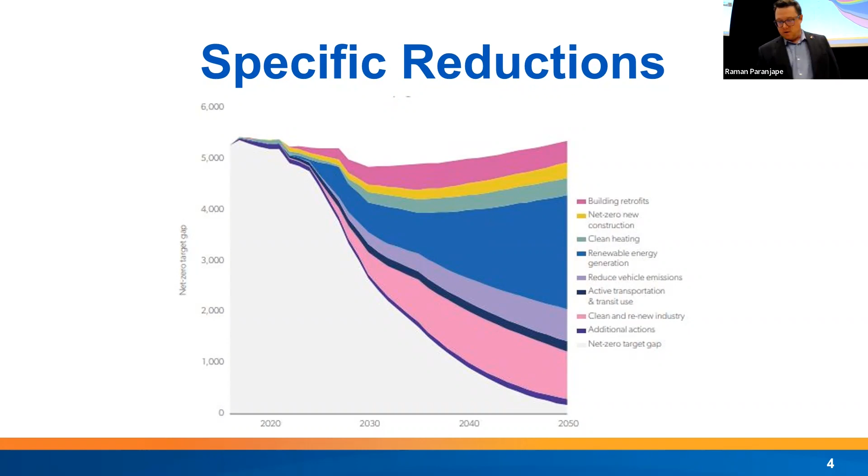How are we going to get there? Seven big moves. This is not some revolutionary theory. Sustainability Solutions Group, our consultant, they've done this for over 60 communities across North America. And this is how they break it down, and this is how they bucket it for every community.

Some of the moves are different depending on the community you are, because we are unique. City of Regina is unique. We are not Vancouver. We're not somewhere in California. It gets cold here. Our electrical grid's different. Our way of living is different, and our perception towards what we want is different. So we really need to work in a different way towards this than every other place as we move forward.

So one of the first ones is retrofitting existing buildings, and this is deep retrofits on a massive scale. There's over, I believe it's 68,000 single family dwellings in the City of Regina, and a vast majority of those were built at least prior to 1980 or maybe a little bit later. As energy codes, as building codes changed, that got better. It's still not the best, but older buildings are horrifically inefficient.

Number one prong of our approach is we need to reduce our energy consumption. So one way of doing that, retrofitting buildings on a massive scale. Switching heating fuel.

You're going to hear Megan talk about natural gas, and I actually get a lot of conversation about this—people ask if you and SaskEnergy must hate each other. I'm like, no, absolutely not. Megan and I connected long ago as this was being produced.

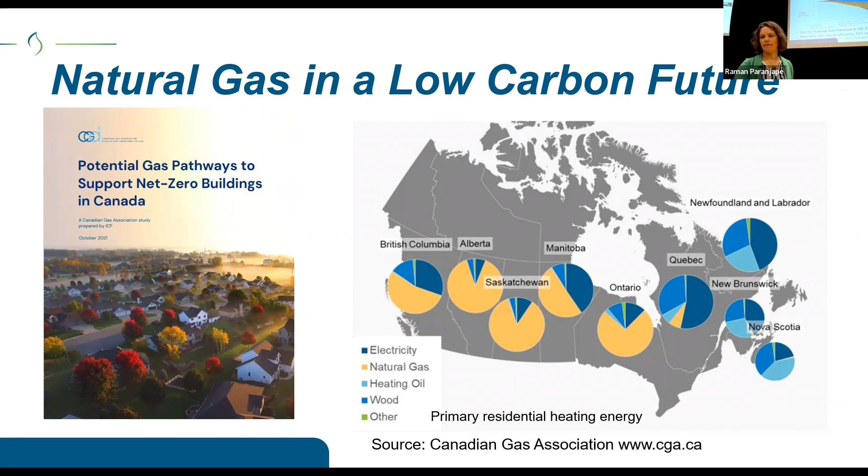And what was found through this is that there are pathways to get down to net zero. That first piece is the most important that needs to be addressed first, and that's energy efficiency. So reducing the gas demand or reducing the energy demand of the buildings is our first step. After that, bringing in low or zero carbon gas supply, and where that's not possible, offsetting that gas with carbon capture, emissions negative emissions technology.

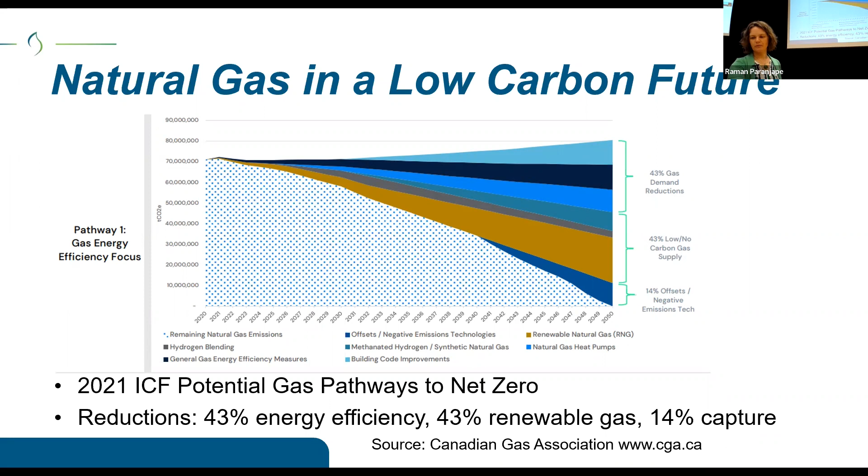So one example of gas in a net zero building is a net zero MURB that is in Saskatoon. It's net zero energy and net zero ready. So it's not fully addressing that emissions piece, but it's a starting point to show there are solutions out there. This building was actually part of a Canadian Home Builders Association challenge, and there was one builder in Saskatchewan chosen, and the goal was affordable, comfortable, net zero ready housing.

This example is currently being occupied partially by low income families, demonstrating the affordability of the solution. And from a technology perspective, there's electric air source heat pumps, both for water heating and space heating, as well as very small, high efficient gas furnaces and smart thermostats to maximize when it's switching between those pieces of equipment.

The design process for this followed LEEP, local energy efficiency partnership. So this is about bringing people together. We had a design charrette, there's designers, there's people from many different perspectives coming together, and then energy modelers going through a bunch of scenarios to say, okay, cost, technology, energy use, what are all the possible solutions? And the builder chose this particular solution. So yes, it's possible with today's technology to get to that net zero energy ready.

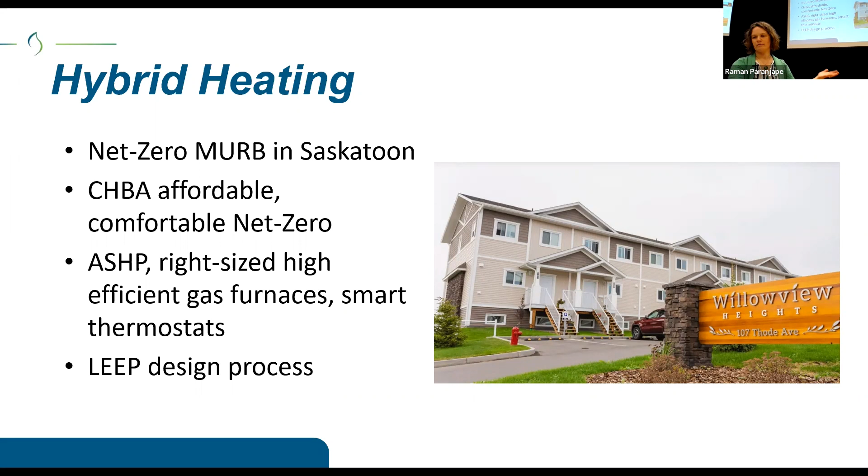More in the energy efficiency realm is how do we help our customers reduce their energy use with the technology that they have, with the equipment that's in their homes, and we provide rebates to incent customers to put in equipment that is higher than what's required by codes, standards and regulations. We started this program for the residential market in 2019 with a 5-month program, and we've now extended year round to offer those rebates. So there's more certainty and no end date, which also allows for flexibility to make changes to the program as needed to keep meeting customer demand, and as we have more data to educate us in those decisions.

Similarly, with our commercial customers, we offer rebates for energy efficiency equipment, so furnaces, boilers, water heaters, HRVs, infrared heaters. And again, that's a year-round program that's available.

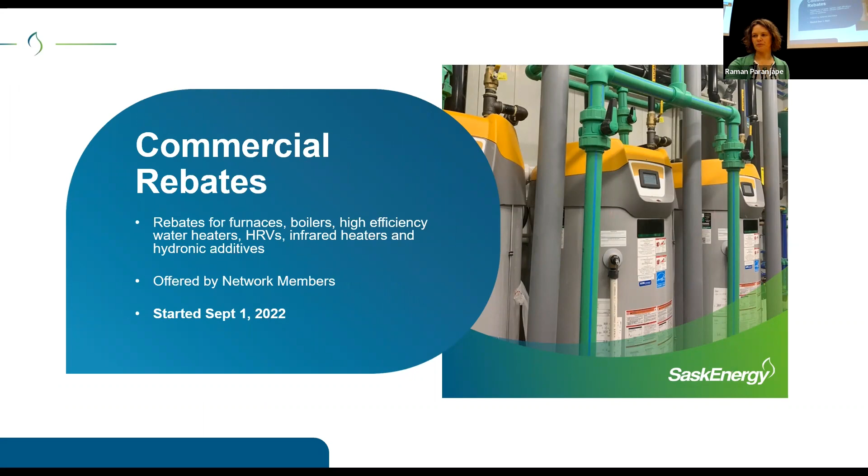But we also know there's more we can do. And to better understand that, we are currently engaged in a conservation potential study for energy efficiency in the gas realm within the entire province of Saskatchewan, looking at residential, commercial, and industrial facilities, so all gas use within the province. Essentially what this study is, is a quantitative analysis of the technical, economic, and achievable potential. Technically we can do a lot. Economically, we can do another amount, but then there are other factors that will actually bring that achievable potential to not be as high as the other ones. So that's taking into account the market, maybe it's the education, it's barriers that we can overcome through some of the work that's being done in forums like this.

So when Greg was talking about their plan, they used technology that's available today. And we also know that there's technology that will be available in the future. So how can we help companies develop that technology? One of those ways is we're a member of the Natural Gas Innovation Fund, and it's gas utilities, and now there's actually producers involved as well. It's really a non-dilutive funding grant that's offered, so we don't have any stake in the technology at the end, but we are helping these companies move their technology towards market and being commercialized.

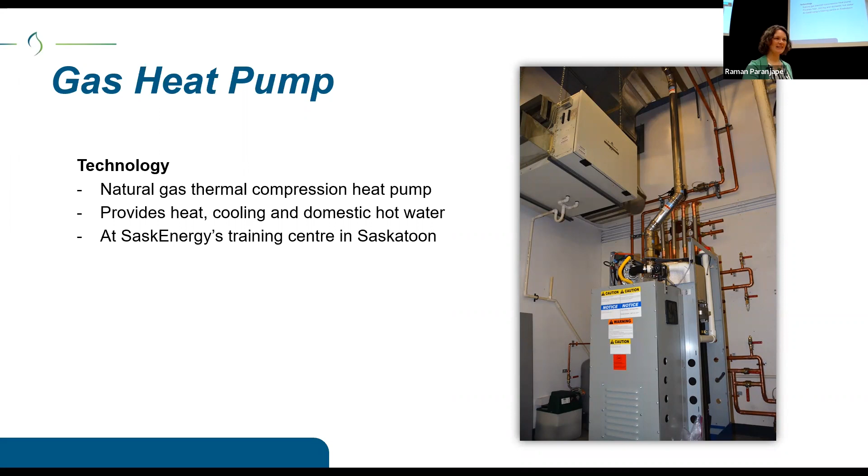Megan, is a heat pump essentially just a boiler system? No, it's more like an air conditioning system in reverse. But it is for space and heating, and it can be like a boiler system is for hydronic heating. And then your furnace is... mechanical engineers out there, help me, not hydronic. Actually, we have a whole presentation. Yeah, we have. Okay, perfect. Heat pumps too, I don't think anybody is familiar probably. You're gonna know. Good, you're gonna get too much. I would give a very high level from an electronics engineering background, and you've got your expert right there. Yeah, thermodynamics is definitely important here. It's the same thing, I just want to confirm because we've been using boiler systems in Saskatchewan for years. It's what keeps my house. Yeah, different technology. Higher efficiency. Thank you.

Another technology that we have helped to install first of in the province is a small scale carbon capture unit. So this is designed to integrate with your boiler systems. If you're not ready to take out that boiler system, this is a solution to tie into that flue gas and capture the carbon out of it, convert it into a potassium carbonate, which is a solid carbon product, which then goes into that circular economy.

And in this case, the company that makes this technology collects it and turns it into soap products. So it's permanently sequestered and not creating GHG emissions. Another benefit that comes from this technology is it's an exothermic process, and it actually preheats that boiler water. So not only are you taking the carbon out of the flue gas, but you're also reducing the energy needed to actually heat your system.

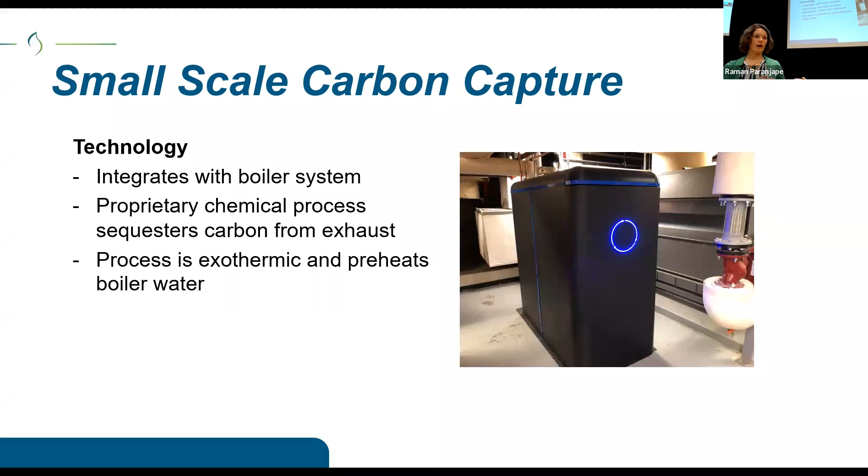So we talked about energy efficiency. That bottom part of the graph from the beginning was carbon capture. And then the middle one was decarbonizing the gas. And two of the ways to do that in a gaseous system are renewable natural gas, and the other one is hydrogen.

And so today we are not able to physically move renewable natural gas on our system, but we are taking steps to move towards that. One of those steps was a customer survey last year - you know, what is RNG, what do people understand, do they know what that means? Only 20% of customers actually knew what RNG is. So there's great opportunity to increase knowledge around that.

There are RNG purchase programs in other provinces, so that is a potential model that we could look at in Saskatchewan as well. Right now, we're working with a consultant to ensure that bringing RNG onto the system can be done in a safe way. So once we get that piece sorted out, we can look at our next steps.

Hydrogen is another gas that can be used for heating, and there are currently 2 projects in Canada. One's in Fort Saskatchewan, Alberta, another in Markham, Ontario, where they're blending hydrogen into the gas system, and that is going into the community.

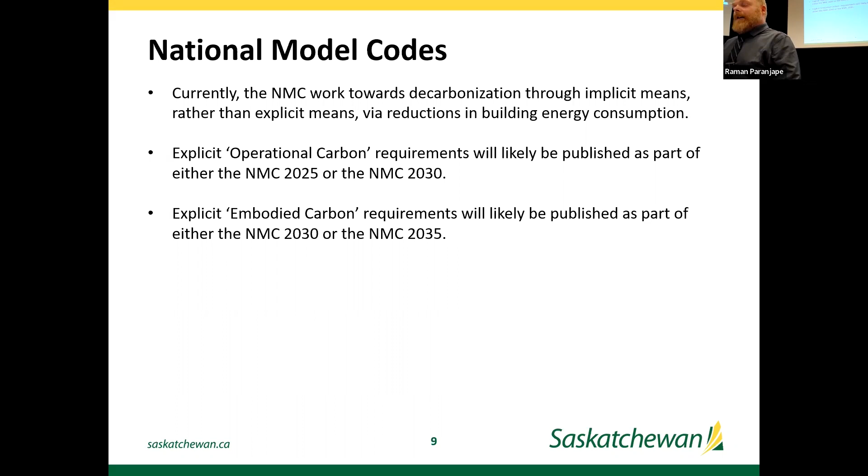Currently the national model codes work towards decarbonization through implicit means rather than explicit means, via reductions in building energy consumption. Right now, explicit operational carbon requirements will likely be published as part of either the 2025 or 2030 code edition, not sure which. Explicit embodied carbon requirements will be further out than that, likely the 2030 or 2035 editions of the codes.

The Construction Codes Act, the Building Code Regulations, and the Energy Code Regulations are the mechanisms by which Saskatchewan adopts, amends, and implements the model national codes, except for fire. This applies throughout the province. This is something places like Saskatoon and Regina may begin to utilize in the near future, but local authorities adopt building bylaws to carry out their administrative and enforcement duties, issue building permits, and collect building permit fees within their municipalities. Saskatchewan's provincial legislation allows local authorities to adopt higher energy code tiers or standards through this building bylaw adoption process.

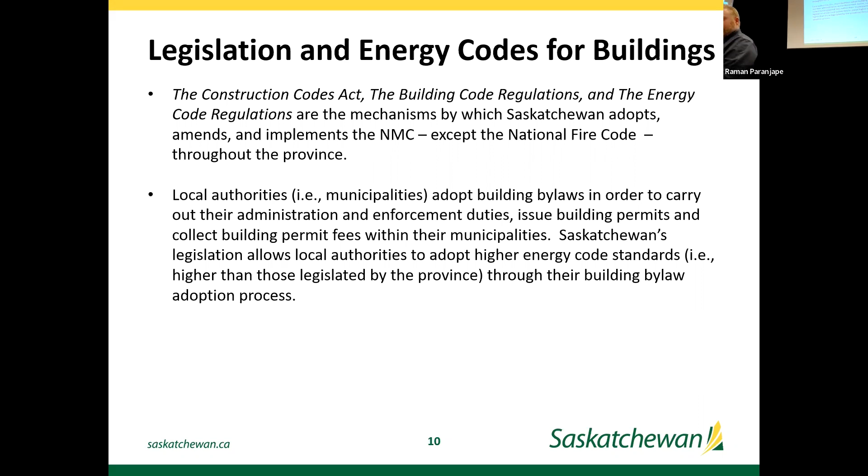The legislation currently in place, the Energy Code Regulations, brings in the National Energy Code of Canada for Buildings 2017 edition, applying to buildings constructed on or after January 1st, 2019. Under the Building Code Regulations, Section 9.36 of the NBC 2015 is in force and applies to buildings constructed on or after January 1st, 2019 as well. Both of these codes, the NECB 2017 and Section 9.36 of the NBC 2015, have three compliance path options for building energy consumption: prescriptive, trade-off, and performance.

What's being proposed for legislative changes right now to the Energy Code Regulations is that the 2020 NECB would be adopted and enforced starting January 1st, 2024, applying to buildings constructed on or after January 1st, 2019. Same thing for the Building Code Regulations — it would adopt Section 9.36 of the NBC 2020, enforced on January 1st, 2024, applying to buildings constructed on or after January 1st, 2019.

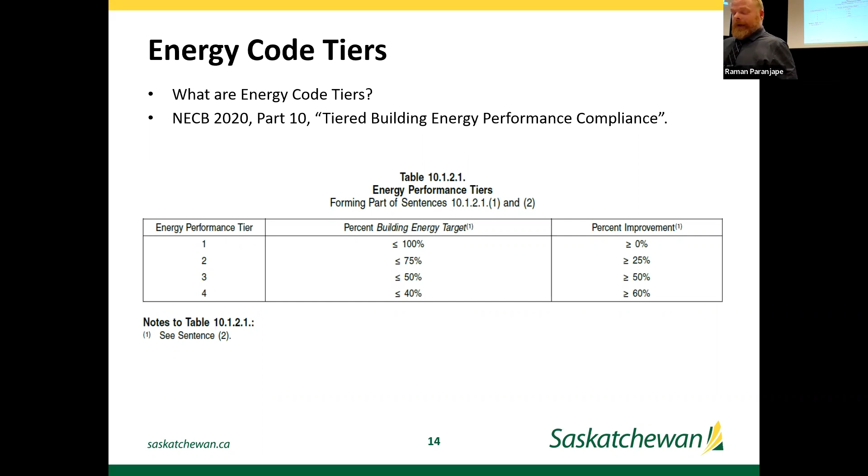So this is another table. This one actually comes out of the NBC. It's subsection 9.36.7, tiered energy performance compliance, the performance path. It's the same path that we just saw, but it's tailored for smaller buildings that are typically covered in Part 9.

This one, in my mind, is at least a little more complicated. I wish they would have laid it out a little better, but they've broken everything down by the volume of the building.

This I just wanted to put up to show you a little bit about it. The other thing you'll notice that's different about this one is there are 5 tiers. So the difference between NECB with 4 tiers, the NBC has 5 tiers.

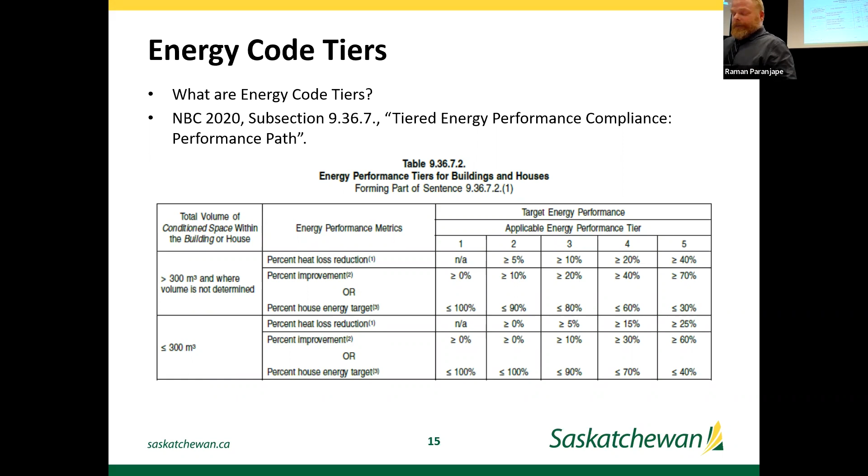This is the last one I'll show you. So this is the prescriptive tiered path. It's incomplete. The codes, when they were published March 28th, 2022, I believe, just over a year ago now.

There were major changes to this section of the code when you compare it to the draft original version that went out for public consultation. So they rushed it and they've only put data in here for up to Tier 2 energy performance.

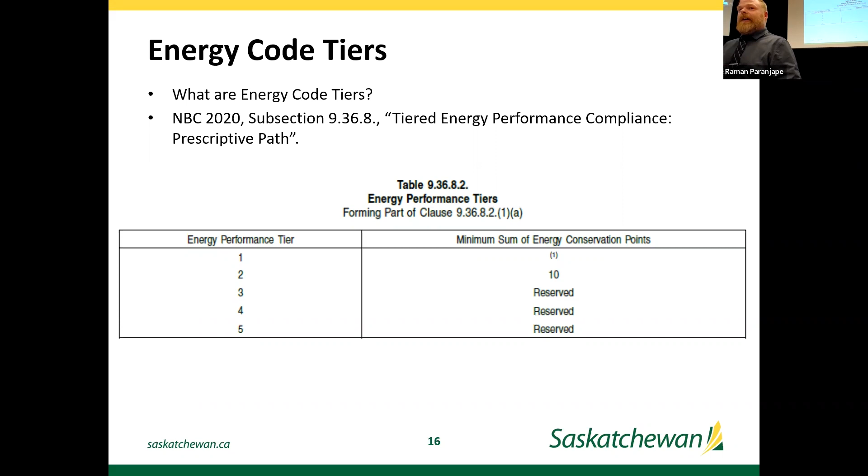So I do know that they are working on the Tier 5 level right now to flush that out, and then they'll work backwards from there to develop Tier 4 and Tier 3. But we're unsure at this time if that will make it into a second edition printing, or if it will even make it into the 2025 edition.

These ones will go through quick. There's a few terms you'll see used repetitively through the code. There's a proposed building and a reference building, and the key takeaway is the reference building is always the baseline.

It's what you compare the proposed building to. And the annual energy consumption is what you figure out for the proposed building, and you'll compare it to the building energy target of the reference building.

Just a couple of fundamental things. Let's go through this one quick too.

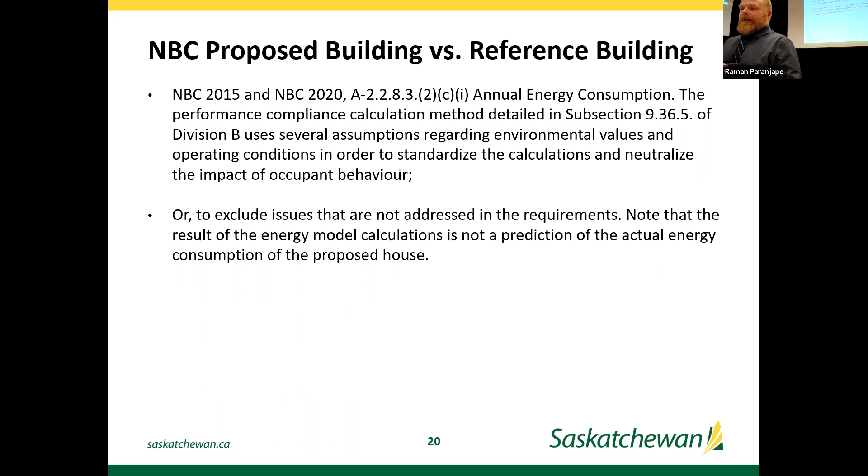This is the fun part.

So modeling simulations for 8 building archetypes were conducted by NRC Research. Results appear to show increases in energy performance expected between a reference building built to the NECB 2017 and a reference building built to the NECB 2020.

Just reference building to reference building, baseline to baseline comparison. We did this for various archetypes located in Regina, Saskatoon, and Prince Albert. For the electrically heated scenarios, simulations showed a 1 to 38% improvement in energy performance moving from one code to the next, with an average of 13% overall. All 3 locations showed similar improvement, with no location showing greater relative improvement. So this is electrically heated buildings.

For the gas heated scenarios, simulation showed 4 to 72% improvement in energy performance going from one code to the next, with an average of 27%. There was greater relative improvement in Prince Albert than either Regina or Saskatoon, but that's likely due to PA being in zone 7A.

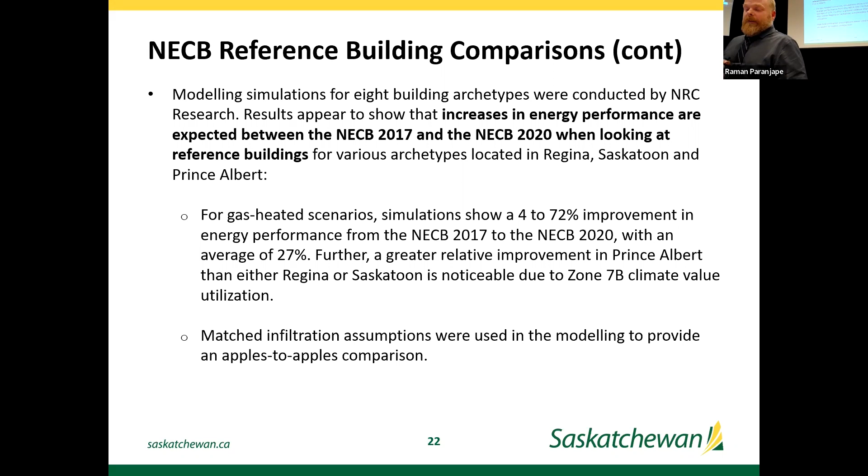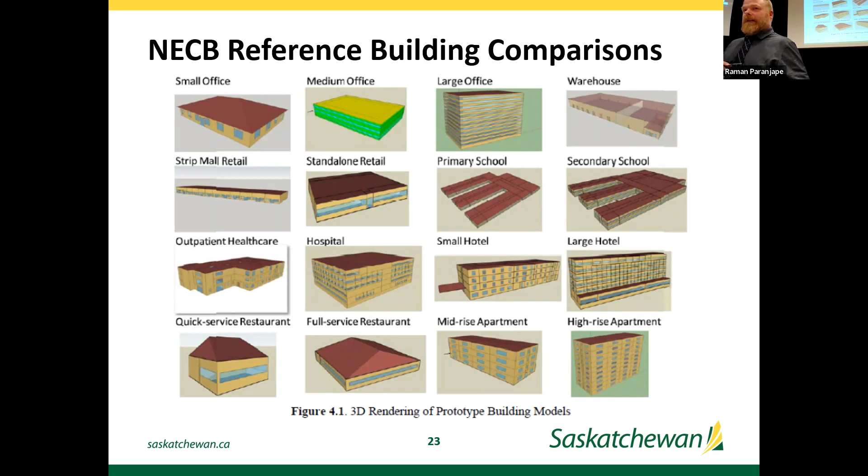Matched infiltration assumptions were used in the modeling data just to do an apples to apples comparison. This data - I think this is more than what we ran - but what we would do is take data out of, I think it's the NREL website, out of the state.

As I said, I'm an engineer. I love data, and I understand that this is quite a bit to take in. So what we've done is compile the data output from the modeled simulations in bar graphs in the next 2 slides that are specific for Regina, which contain the 8 reference buildings shown here.

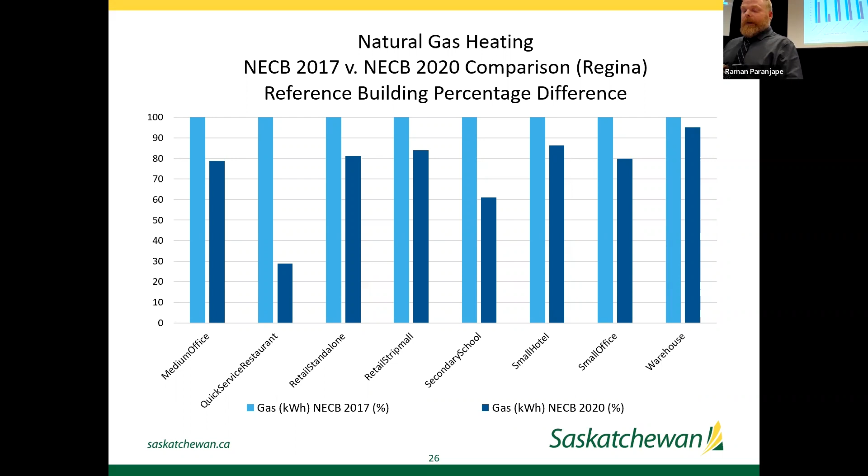This is gas. You'll notice quick serve restaurants can kind of jump off the chart on you. So there are some archetypes where the code seems to have more impact than on others. Warehouses, obviously, have the least amount of impact, but quick serve restaurants have the most. Office buildings generally see a 20% reduction, whether medium or small. So I think this graph is a little better to look at than the other one.

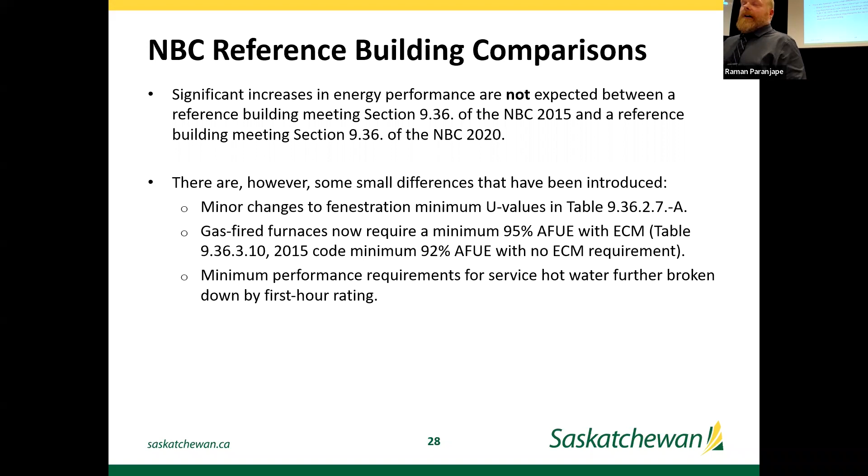Now going to the NBC 2020. Significant increases in energy performance are not expected between reference buildings built to each code, so moving from the 2015 to the 2020 edition of the NBC, there's very little change. There are, however, some small differences introduced. Fenestration minimum U-values in that table have changed. Gas-fired furnaces now require a minimum 95% AFUE instead of 92%. And minimum performance requirements for service hot water are further broken down by first hour rating.

That's all I've got. I hope it was informative, and I'll take questions.

Okay, lots of questions. I'm hard of hearing, so I'm going to come down a bit. Actually - can you go back to slide 12? Slide 12, please?

It says that it's in force on January 1st, 2024, and it applies to buildings built like 5 years before. How does that even work?

Well, the way the energy code is set up, you can never apply the energy code book itself to a building that was never built to the original energy code. That's where you need the alterations to existing buildings code to come in. Once it arrives, it'll have energy efficiency provisions for buildings that predate January 1st, 2019. You have to treat them differently.

For example, if I built a building January 2nd of 2019, I would have had to build it to the 2017 NECB. If I'm deciding to do an addition or a major change to that building, this code applies to it again - but it's the code of the day. If I built one in 1980, this code can never apply to it.

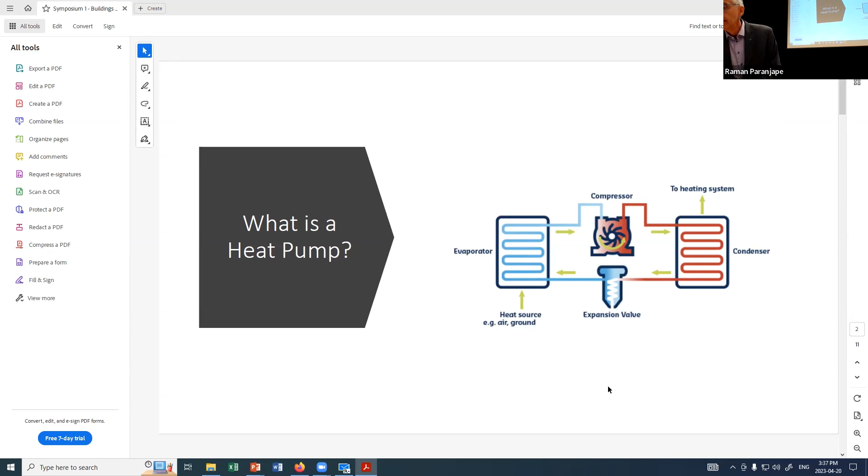Okay, so one more thing on this. This is a demonstration of the energy arrows. So you have energy that goes in to run the compressor. It absorbs energy from whatever the source location is, and it rejects energy out into the sink, whatever that is.

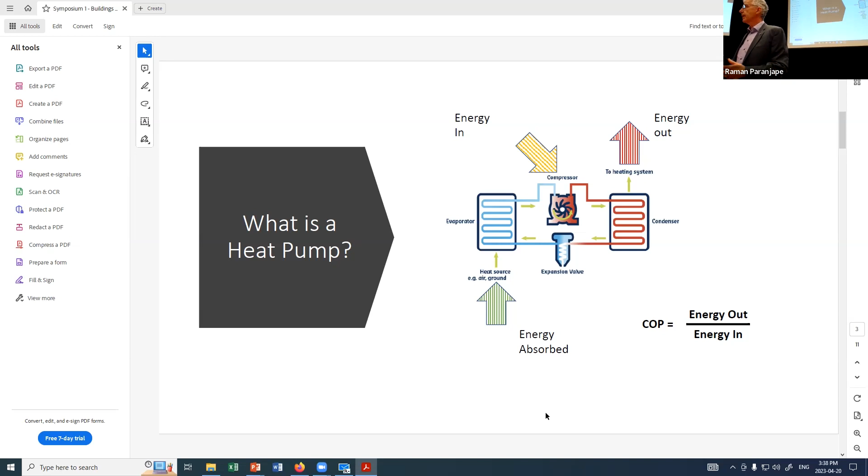And the important thing, Megan talked about it in her talk, the thing to remember is coefficient of performance, COP. That is the measure of the amount of delivered energy divided by the amount of energy that it takes. So you'll see lots of publications where they talk about COPs, and we're going to actually use it as we go through here.

So for heat pumps, there's lots of different types. On the electric side, we're generally talking about electrically driven compressorized units. They're generally categorized by what their heat source is, mostly.

Okay. So in the case of electrically compressorized heat pumps, we have a few very simple broad categories. The one that most people are familiar with would be an air source heat pump, where you're absorbing heat out of the air. Whether or not that air is outside or inside, you're absorbing it out of the air. So air is the source.

And it can be delivered to either air or water, depending on how it's configured. Do you want to deliver it into a furnace or fan coil system? That would be an air-to-air with an air source, or you could have air to water, air into an underfloor heating system.

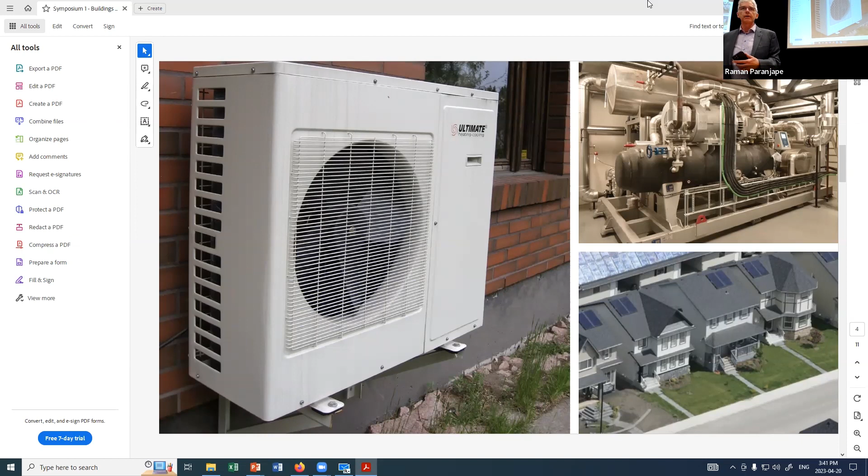And there's lots of different scales. You can have this, the one that I have on the left-hand side of the screen is like an air source heat pump for a house. It's essentially an air conditioner with a reversing valve in it. Or you can do it at the community scale, which we have a picture of Drake Landing in Okotoks, Alberta, which is several sets of townhouses, a small community development that use ground source heat pumps, or they can be massive at the industrial scale. And indeed, all of these have positions or uses in the marketplace, depending on what we're trying to get.

Okay, want to talk a little bit more about water source heat pumps. So the fundamental difference, or one of the limitations of an air source heat pump in a cold climate is the fact that you can only absorb heat out of air down to a certain temperature.

And that is based on several thermodynamic reasons, but there are lower limits in outdoor air temperature that you can take air out of. And currently, the absolute best heat pump on the market today cannot take heat out of air colder than about -25 or -27. And even at that, it does it very inefficiently. So that's a limitation for our climate, and we have to have other measures in place to help us solve the heating problem for space heat.

Water source typically doesn't have that issue because the water sources are typically not frozen. So all of a sudden you've got a source temperature that is up closer to the space temperature you're trying, or the delivery temperature you want. And in the case of a ground source, it is very stable. So if you have ground source heat pumps, that heat is available for use with the heat pump year round and is not weather dependent.

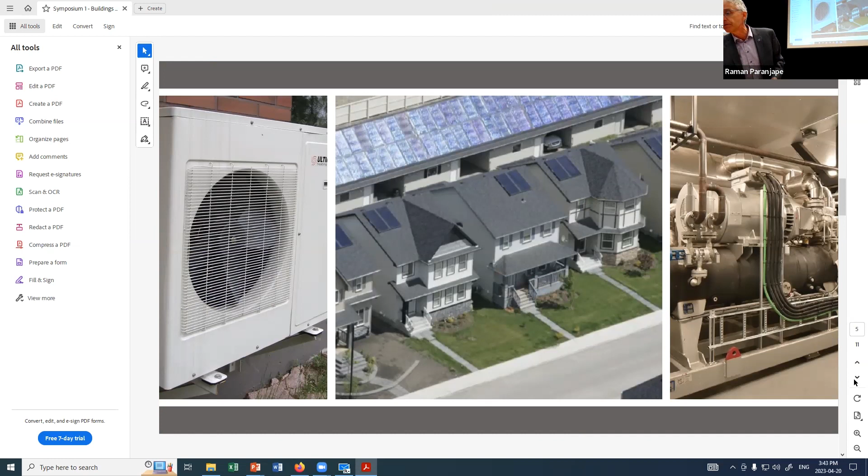I have to say that the COPs, or the coefficient of performance, also varies greatly with them, because the coefficient of performance has a lot to do with the temperature spread between what you're trying to heat and what the source is. So the narrower the temperature difference that you're trying to overcome, the higher the COP.

So if you're trying to deliver 20 degrees C in your sink, and you have 0 degrees C as your source, that's going to use a lot less energy than if you're trying to take it out of -20 degrees C. So you think about the amount of work that it has to do. The COP, just the thing to keep in mind, you get a higher COP, the narrower the temperature differences between the two. And indeed, I show the industrial one because there's many applications where you can get really kind of funky temperature ranges, and so the equipment has to be developed very customizable to what the needs are.

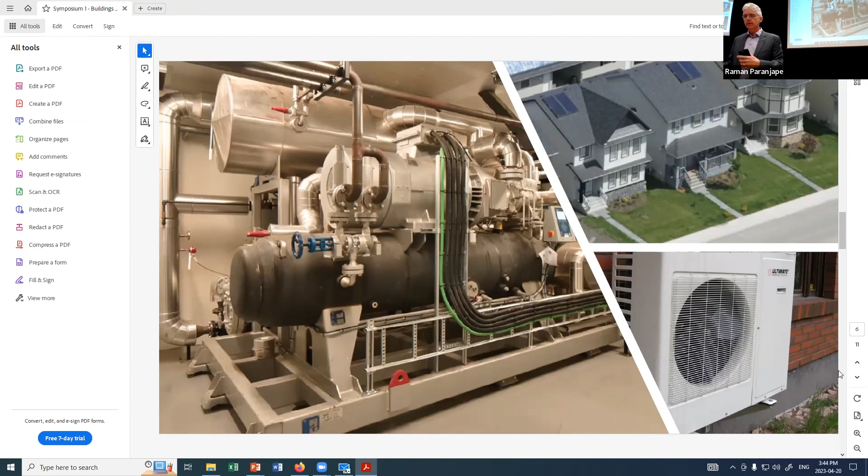Now we're going to talk about gas as a heat source, as a source of energy for heat pumps. I took these two slides to talk about the two broadly typical types of refrigeration cycles for use in gas-fired heat pumps.

The first one uses natural gas as the engine driver for a compressor. So it's still a compressorized refrigeration system circulating the refrigerant, the same as the electric compressorized system, merely using natural gas as the driver for that motor.

The second method uses an absorption cycle, which is completely different. It uses another refrigerant that is soluble in water to move energy, and the gas is the heat source to boil off that refrigerant and help that cycle continue. It's completely different.

We could spend hours just talking about absorption cooling. It does have its application. Again, these technologies have been around forever. It's just trying to get them into these current applications.

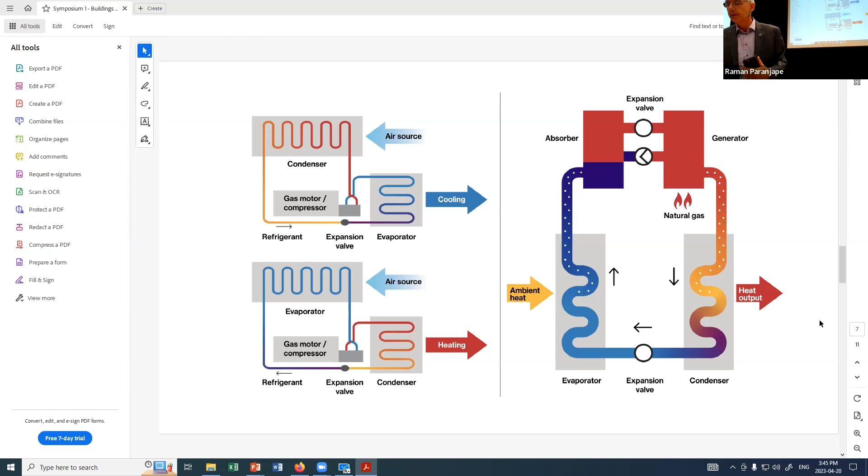So what's new and what direction are we going with heat pumps? First off, the US Department of Energy with NRCan has a cold climate heat pump challenge on right now. The first results of those heat pumps are going to come to market very soon. I think I saw something from maybe Lennox just pop up on my screen yesterday that they're going to have a new product out for this coming heating season. So that is looking at driving up COPs and expanding the range of operation of heat pumps.

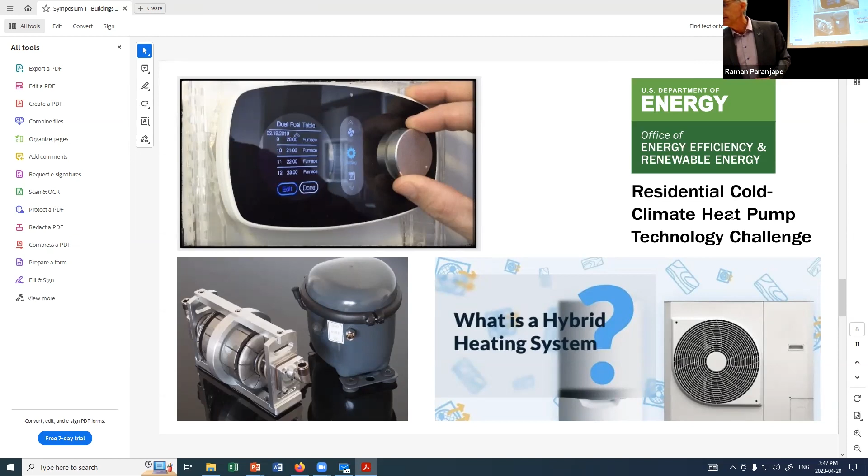We have always had progression in compressor technology, and we have many manufacturers of compressors going into these devices who are always working on improvements. Probably the most intriguing thing is now we're getting manufacturers to package hybrid solutions, so you don't have to cobble together a hybrid solution yourself. You can actually buy hybrid solutions, mixing heat pumps combined with conventional heating technology.

One of the things we've talked about a couple weeks ago, and Megan talked about before, is we have an issue here in a cold climate in that we cannot heat with an air source heat pump. We cannot heat a building at -40. It's technically not possible. So what do we do, how do we address it, and what is the impact of that?

If you look at the range of temperature operations or the climate, we actually don't have that many operating hours in the year that are outside the range of a heat pump. But if it's dark out and it's -40, you still need heat. So you have to have that heat source in place. Even though it's not very long, you do need that peak demand.

Right now, I can say confidently that the best solution for that, and the only solution for that, is natural gas. And that's going to be the case for a long time, because even though there's improvements going on the air source heat pump side, you are not going to see air source heat pumps at -40. It will be many, many years before that happens. So I believe that hybrid technology, mixing heat pumps and gas, is a solution.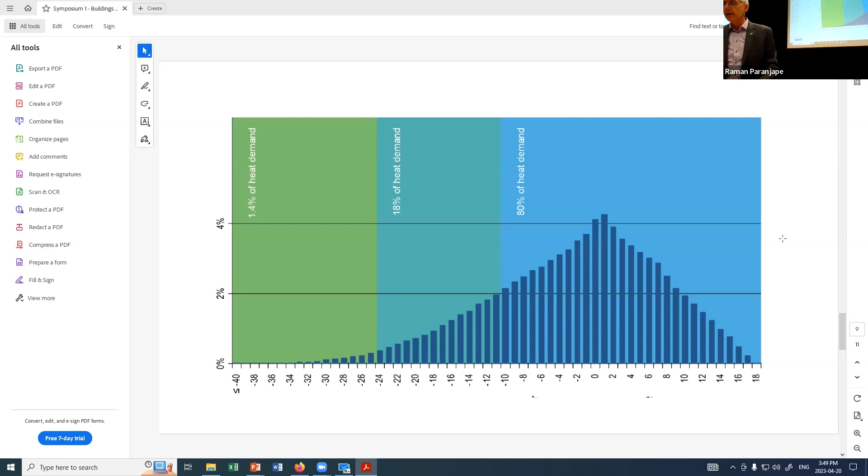Okay, so I talked a little about the ground source heat pump, and again, Andy's going to get into it. We have a couple of the most typical ones: either horizontal or vertical loops, where you have plastic tubes drilled into the ground that circulate a fluid, and they become the heat source for an indoor water-to-air or water-to-water heat pump.

So they're using the heat in the ground as the source, but really what they're using is the ground as a battery. You're putting heat into the ground in the summer and taking it out in the winter. The problem we have in our climate, though, is we are heating dominant.

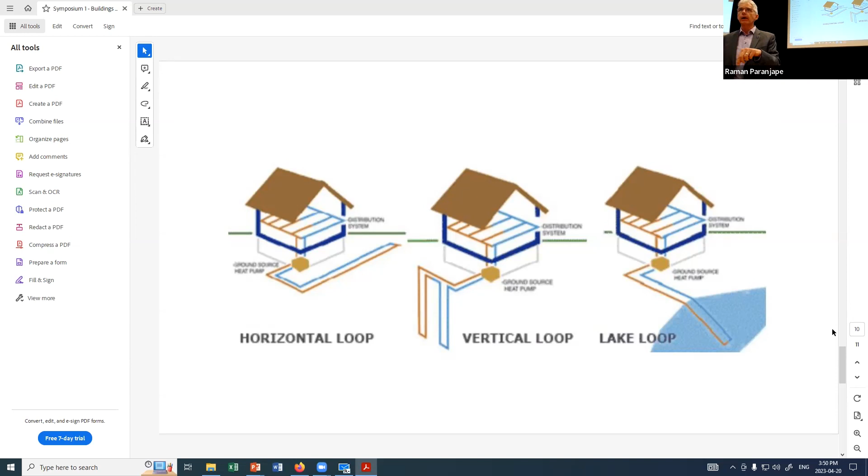So if you think of that same battery, the battery is slowly decaying over time as the temperature range in the surrounding area, around those boreholes or in the horizontal loops, decays to the point it gets outside the operating range. There are solutions for that—think of a trickle charger. You have to find how you can economically and renewably put heat back into the ground if you're extracting too much, and there are ways to do that.

So one last slide I wanted to talk about is carbon and the application of heat pumps now, and the forecasts that SaskPower has electrically. I can tell you, unequivocally, that if you put an air source heat pump in now, today, even operating in hybrid mode, you'd actually emit more carbon emissions based on the emissions of SaskPower's grid today. Natural gas is still a very effective way of delivering heat from a carbon point of view.

Now, that's a moving target though. We can see that SaskPower's emissions are dropping dramatically over the next few years. So where is the point where we're actually saving carbon?

So I did a little bit of hand math, and with a COP of between 2 and 2.5, so not a very good heat pump, one that's operating in cold weather, within about 3 to 5 years you will actually be in a neutral position. So once we're beyond about 2028, and you're using even the poorest heat pump on the market, you will start to save carbon. So that's something to keep in mind, because it's not where we are now, it's where we're going.

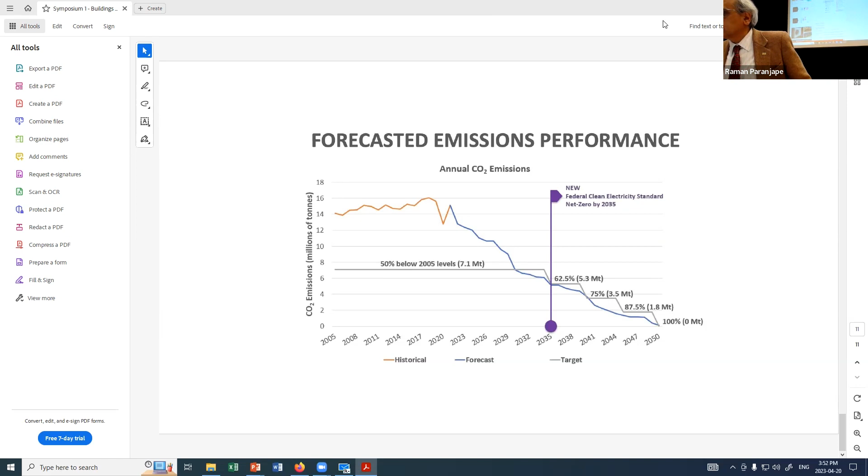This is not on cost, but in 3 years, if you have an air source heat pump installed, it will generate no more carbon than gas. And then it will decline after that.

So a heat pump, let me get close to the mic. Yes, you run a heat pump both in heating and cooling mode. And my position is that you should put the heat pump in now and just not use it in heating mode until 3 years from now, 5 years from now. Because, I mean, almost every house that's built today has air conditioning in it, so you could spend a small increment and upgrade, so you're not paying the whole thing. And then, because it's using more carbon now, don't have it in heating mode. As soon as the carbon intensity on the grid goes down, you can turn it on, or if you put solar panels on.

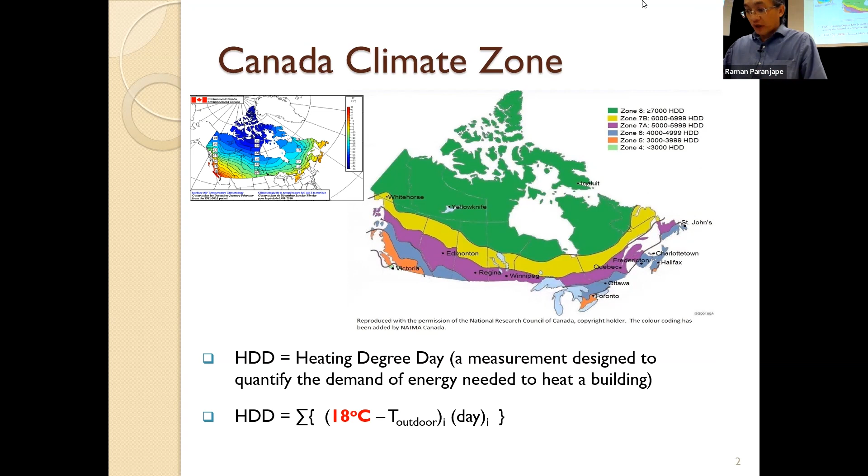So HDD stands for heating degree day. It's a measurement to quantify how much energy we need to heat the building. Basically, HDD has two components: one is how many days we have very low temperature compared to the standard temperature, which is 18 degrees Celsius - this is where the heating starts kicking in. So if we have a very long time, many days needing heating, the HDD will increase. So in Regina, of course, we have a very cold climate.

Because of this, we have a very long time to do heating each year, about 7 or 8 months. So because of this long period, finding a very good solution for heating really matters for us.

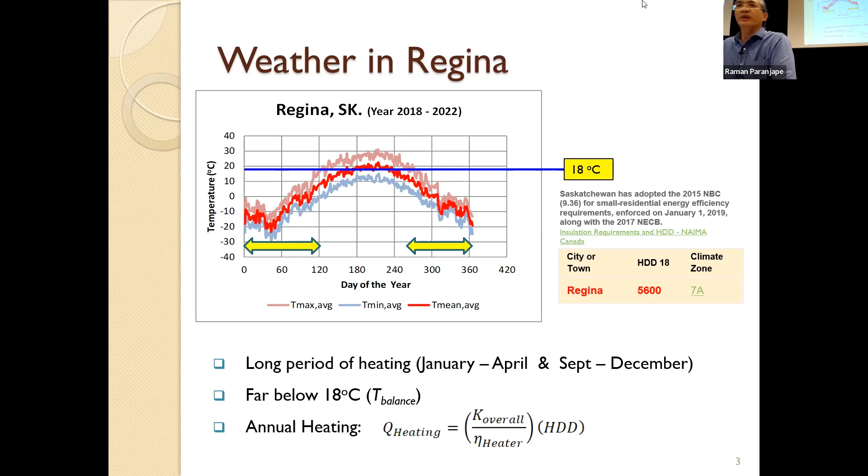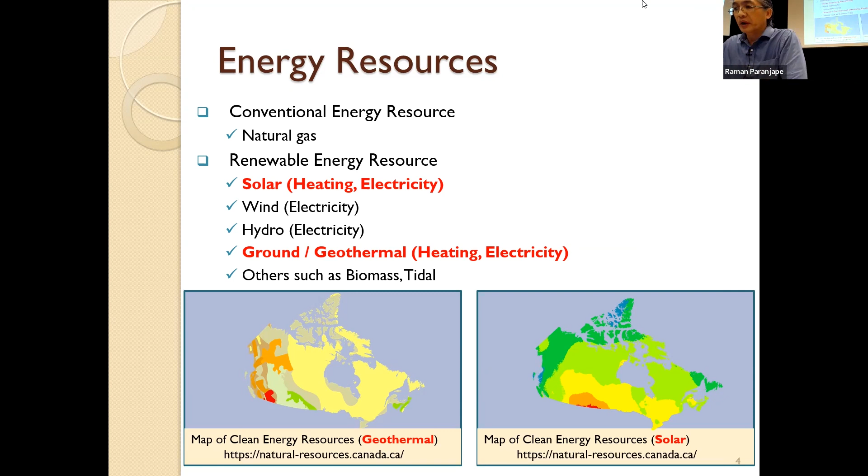Heat pump is basically one of the practical techniques we can use to extract renewable energy from the ground, by using the heat pump.

We transfer heat from the low temperature environment, which could be 0 degrees Celsius, and provide it to the heating space, which could be 20 or 25 degrees. So this is basically moving the free heat, I'd put it that way, from the ground and using it in the heating facility.

The component that drives the whole system is the compressor. You need to add some energy to make it work. The very good concept of the heat pump, as Tom mentioned, is that we only need to provide a small amount of power to run the compressor, but we can move a big chunk of heat to supply to the heating facilities.

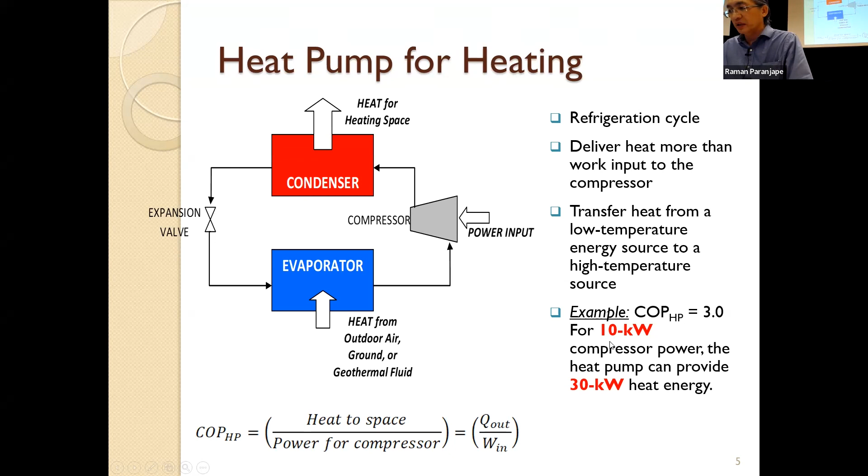For example, if you have a heat pump with a COP of 3, that means we need only, say, 10 kilowatts of power to run the compressor so that we can move 30 kilowatts of heat. That's basically a win-win situation - in my analogy, getting 3 birds with 1 stone.

The same number basically applies to the electric heater as well - if we use 90% electric efficiency, we need about 133,000 per hour to heat the house based on this requirement. But if we use a heat pump with a COP of 4, we need only the power supplied into the compressor, about 30,000, so that we can move this much heat, 120,000. This shows that by using a heat pump, we have very good potential to save a lot of energy in the exchange.

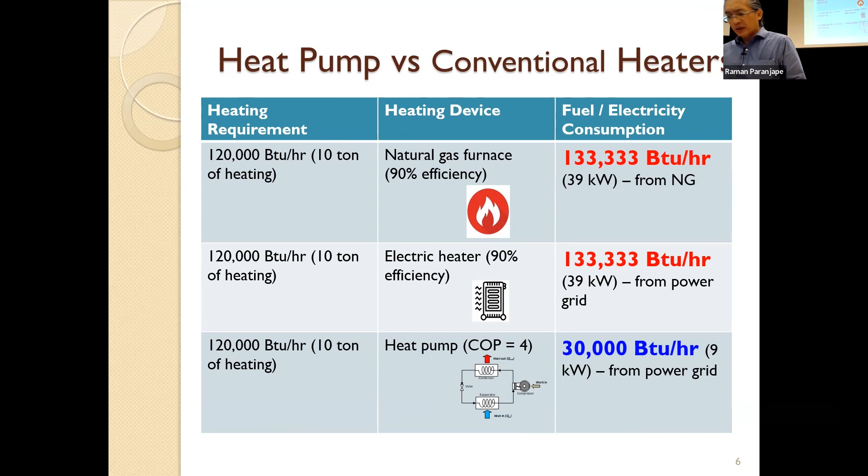The performance of the heat pump also varies with several key factors. One of the factors is, of course, the type of refrigerant we use. We can use R134A, which is the refrigerant used in your refrigerator at home, or you can use R410A, which is the typical refrigerant used in commercial heat pumps.

Another key feature is the temperature of the heat source. You can basically draw heat from a source with different temperatures, and the higher the heat source temperature, the greater the performance.

So I put together the basic concept of a two-mode comparison. The first is a heat pump that runs with a heat source temperature of 10 degrees C. This heat pump can provide a COP equal to 5, meaning you can produce heat transfer 5 times the energy put into the compressor. Based on a COP of 5, the compressor requires only 0.7 kilowatts per ton of heat that you'd like to move.

If we lower the heat source temperature to -30, the COP drops right away to 2.3, meaning we need to spend about 1.5 kilowatts to move 1 ton of heat. That is a fair comparison - using the heat pump at the right temperature is key.

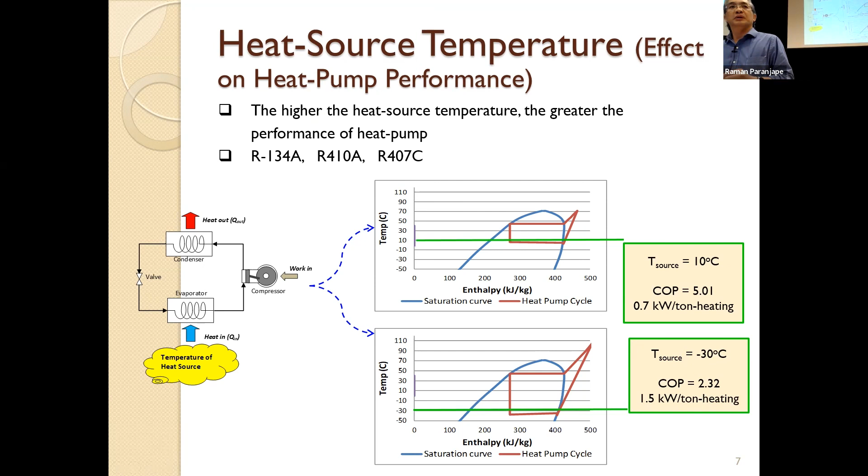Now let's look into the heat source for the heat pump, which in this case could be outdoor air or ground temperature. For air, as I showed earlier, the air temperature can go down to -20 degrees C, which is a situation where the heat pump doesn't work very well because the temperature is too low.

So how about ground temperature? Ground temperature varies with depth under the surface of the ground. I did a simulation looking into how temperature changes with depth. Near the very top, about 1 to 2 meters, the temperature varies a lot during the year, between summertime and wintertime, fluctuating with the air temperature.

But if you look further down, about 5 meters plus, the temperature is quite stable - nothing changes with the weather. Even in wintertime, we could have about 5 degrees under that. So that's the key - we can make use of the ground temperature to facilitate the heat pump as well.

Now I did a comparison between different types of heat pumps: air source, where we take heat from outside air, or ground source. With air source, because of temperature fluctuation, it works very well during April or early fall, but because of low temperatures during January, March, and towards the end of the year, it's not going to work well.

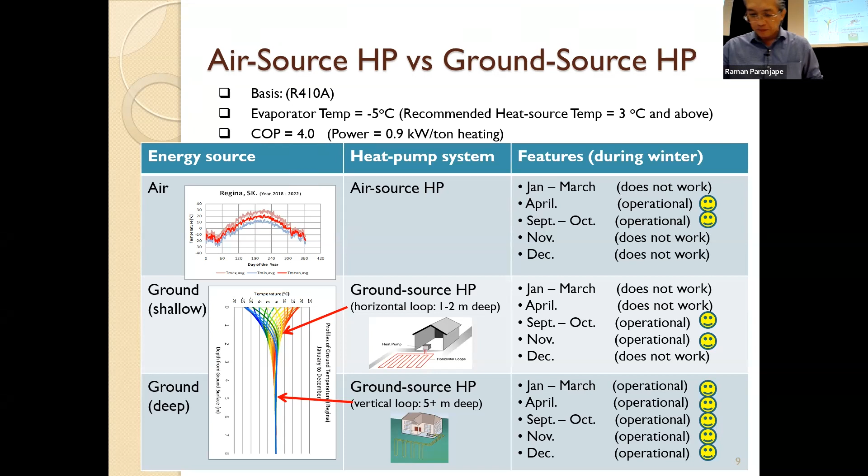Looking at this is the cost comparison, just to pick the case of one household, using two systems: natural gas and ground source heat pump. Natural gas consumes quite a bit of energy, so the operating cost will be quite high, for example $130 per month. This is used as comparison only, do not use it as a fixed number. By using heat pump, because of the COP of the heat pump itself, the operating cost will be quite low compared to natural gas. It can go down to about 30 percent below what you use for natural gas.

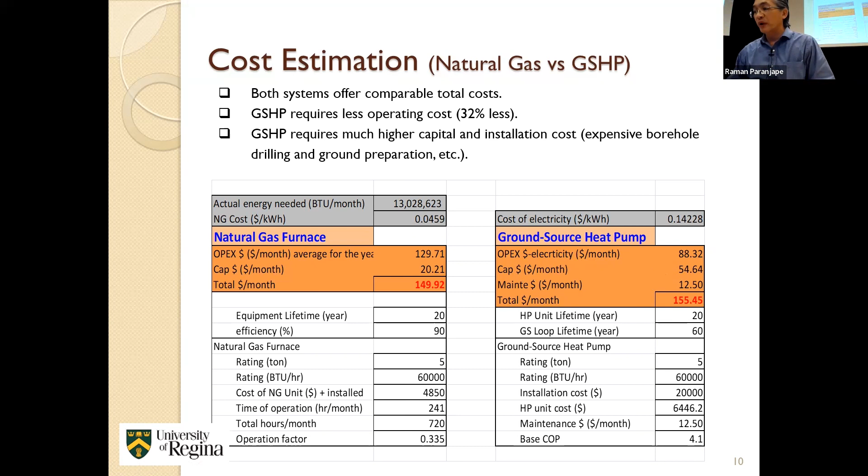The capital cost, however, the natural gas burning is low. The capital cost of the ground source heat pump is quite high. That is something that prevents people from applying, because we have to start building it up before we capitalize everything. It takes so long time, right?

I did just a rough calculation: let's say if 120 kilowatts of heating supply is needed, you're probably going to need about 81 boreholes to make that happen. The footprint could be 63 by 63 meters, the depth could be 50 meters. I'm talking about the reality at the moment. This particular portion is what prevents us from using the heat pump effectively.

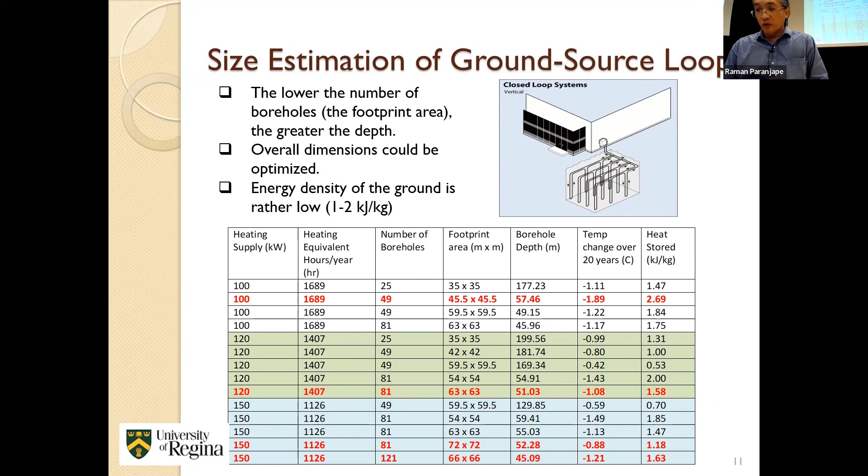So in order to lower the cost, what can we do? We can reduce the footprint by designing the entire system to have a very good balance. Sometimes you have to put heat under the ground during the summertime before you take the heat out in the wintertime, so we might have to do some of that as well. Or you combine a heat recovery unit to take waste heat from somewhere and use it as backup heat instead of using 100% ground source.

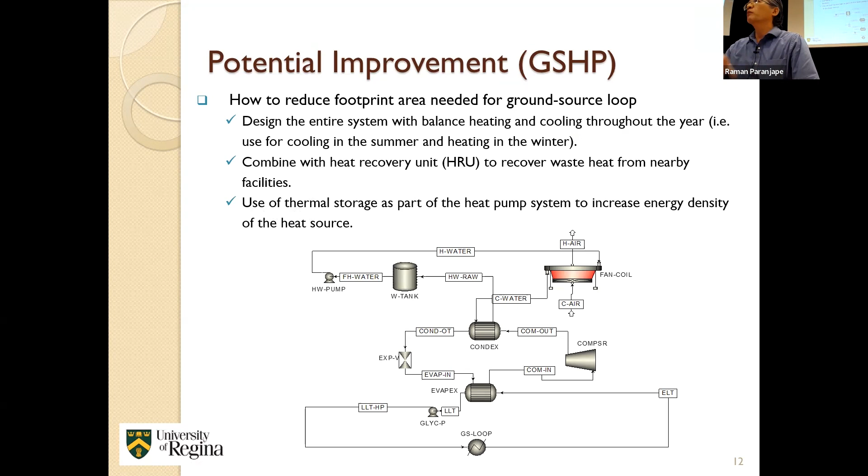Or you may basically look into thermal storage. For instance, we have a lot of sun energy - what happens if we try to capture that sun and put it under the ground as well, becoming part of the thermal energy storage. That is basically something we have tried, to increase the energy density of the ground so that it works more effectively. So that's something we can think about.

In conclusion, the ground source heat pump system can be used as an alternative to conventional natural gas burning. The vertical ground source system is more applicable in cold climates because it's warm down very deep. Ground source typically requires lower operating costs but big capital costs. Improvements can be made to the system, and it's up to us to try to make it happen, to make it more competitive.

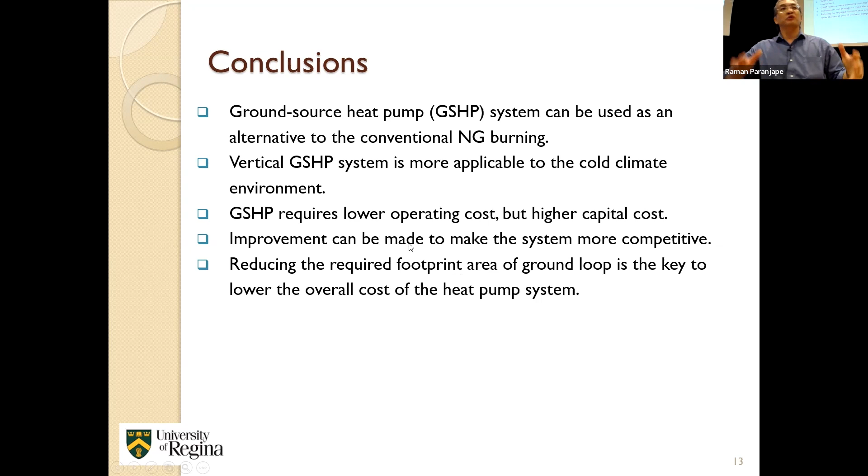All right, we are running very late. Go ahead, one question. Yes.

One of the requirements when designing the piping under the ground is to have proper separation between the boreholes, so that they allow time to let the temperature of the ground balance out. But again, the best way is to try to find a source that can balance the heating and cooling, so that particular space can shrink down - you're not going to use too much of the space in that case.

So you're all very nice. Yeah. All right, really good. Thank you so much. Thank you.

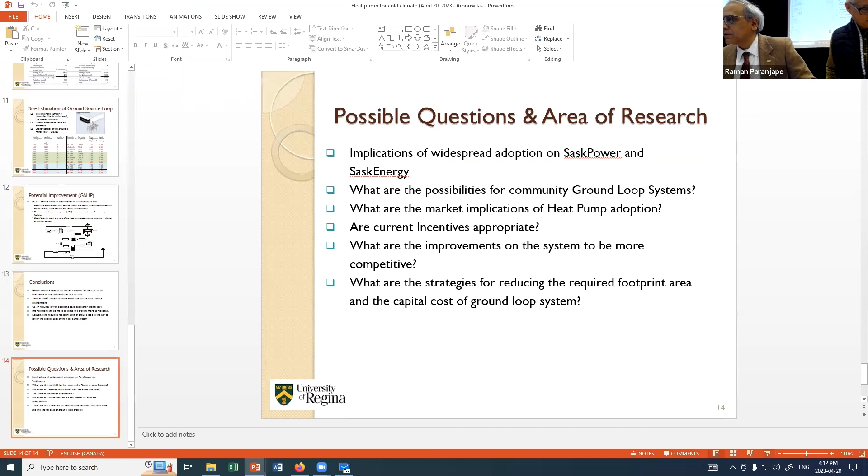Don't say that. Well, okay, we're getting this set up. I'll start my introduction because we're a little short on time here. Thank you to the faculty for having me out to speak today, to the group. I'm surprised as many people have remained as we're getting close to the end, so hopefully I can find a little bit of entertainment value here.

As this is coming up, what really made me think is that the big picture is always made up of little details, and the last presentation is a good example of that. So I'm going to talk a little bit about home ownership and home buying and how that fits into decarbonization, and about the big challenge being retrofits and how do we move the market in that area.

As I started to think about this presentation, I went to my new mentor, ChatGPT, and asked it 5 questions. Who attends decarbonization seminars? Well, it's people like us in the room, right? We already have a stake in this at some level. Maybe we're working for a government agency, maybe it's part of our work, but there's probably a more direct economic line between us and this subject matter. So who doesn't come to these type of seminars? Well, people with a lack of knowledge, people not interested. And for most people, we have so many more immediate priorities than this conversation today.

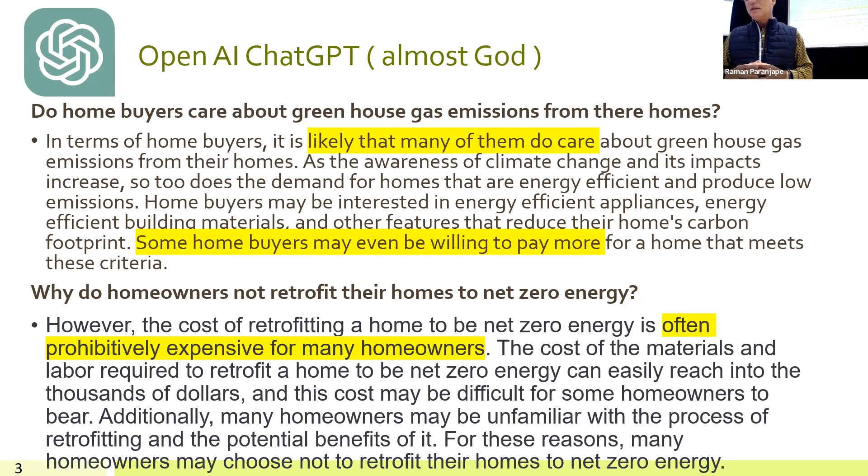So I asked the next question: do home buyers even care about gas emissions from their homes? And ChatGPT said likely most of them do. In fact, some of them are willing to pay a premium for decarbonization. So why don't they? Because most home buyers and homeowners looking at retrofits see these things as prohibitively expensive.

So the most important question I asked ChatGPT was, what would it take to get homeowners to retrofit their homes to net zero energy right now, and not wait for the codes and all these other processes to come together? ChatGPT was really clear on this: incentives and subsidies offered, and explaining the process and the potential benefits. What got me thinking is that most professors looking at ChatGPT rated it as a C+ student at best. And if a C+ student can figure this out, so can we, because it is that simple.

What I'm arguing today is that this is basically a marketing issue and a financing issue, because as you've heard through the day, the technology is already there. It's how we pay for it and how do we motivate people to make a different decision.

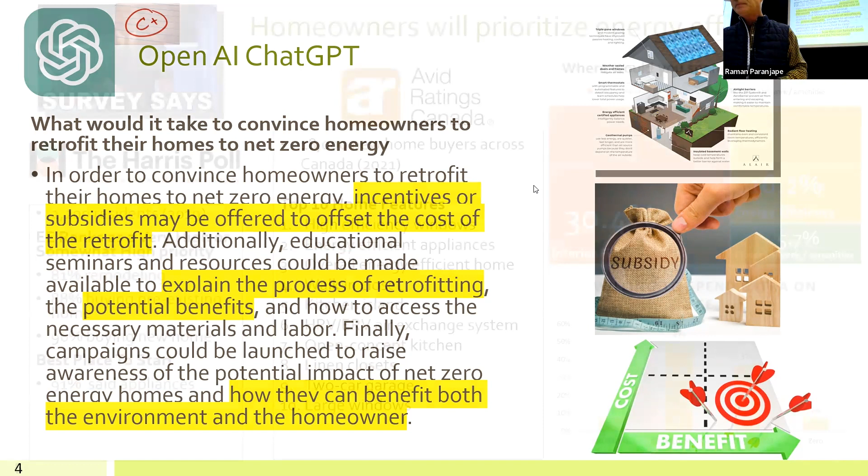So homeowners, they're pretty much almost there. You can find lots of different polls and surveys out in the market - here happen to be two of them. People are ranking energy efficiency as very high or somewhat high when they're remodeling, buying a new home, or buying an existing home. Avid Ratings, who did this a couple of years ago, are doing another one - they've actually completed the 2022 one, that's just coming out, and it rates energy efficiency in the top 3 categories of what was important to them.

So the consumer is pretty much there. When asked where they would spend extra money, 16% said they would put it into energy efficiency. That's actually moved up a lot over the last decade they've been doing this work. Having said that, it's still half of what goes into interior finishes. And when asked where they'd spend the extra money, about 86% said somewhere between $3,000 and $10,000 was what they'd be willing to invest in additional energy efficiency.

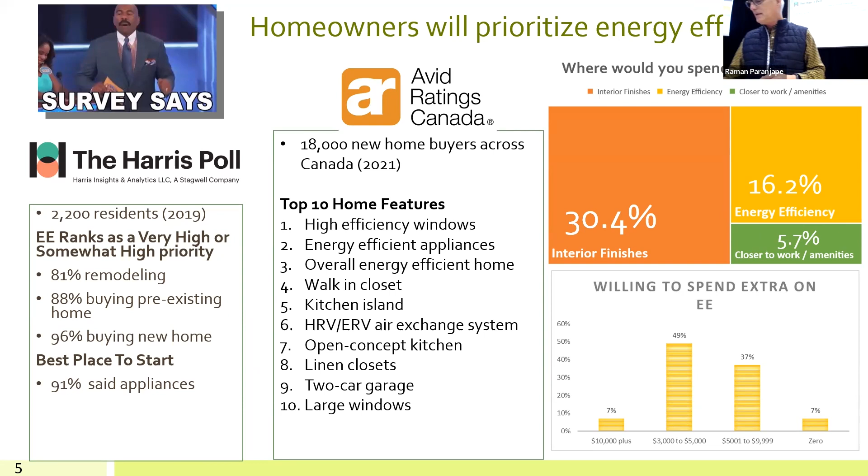So let's start with the premise that if building a net zero ready energy home cost exactly the same as building to code, every home would be built to that right now. Because why wouldn't you? There'd be nothing but benefit and no downsides to it.

But in today's environment, using an example of about a 1,500 square foot single family home, you're going to pay about a $30,000 premium to get that to net zero energy ready. Good news is it's about $100,000 less than it was a decade ago. And as the energy step codes start to come into place, that is going to add costs, but it's going to start to lower that gap. In fact, today you can build that home to net zero energy right now for the same cost as building to code. But there are trade-offs, and that's the challenge - the trade-offs.

Because this is the dream of home ownership. It's not just owning a home, but it's all the things that go into a home. Today, more than ever before, the amenities and features we can put into those homes are second to none.

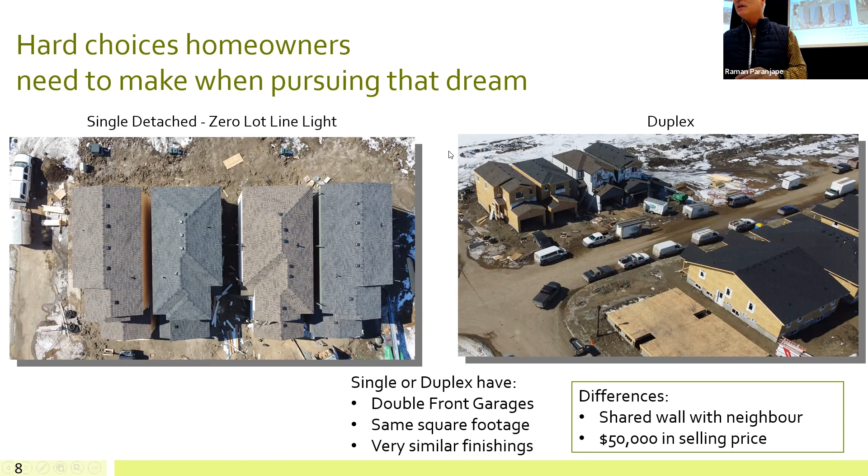And that's competing every day against those decisions around decarbonizing and making investments in our homes. Making hard decisions is difficult for humans. It involves trade-offs, sacrificing one desirable outcome for another. And when we apply our own personal values, our beliefs and emotions, it's hard to remain objective through that process.

So let's talk about climate change communications for a while. It tends to be like we see in discussions like today, very scientific, lots of public talks, lectures, media interviews, social media, public campaigns.

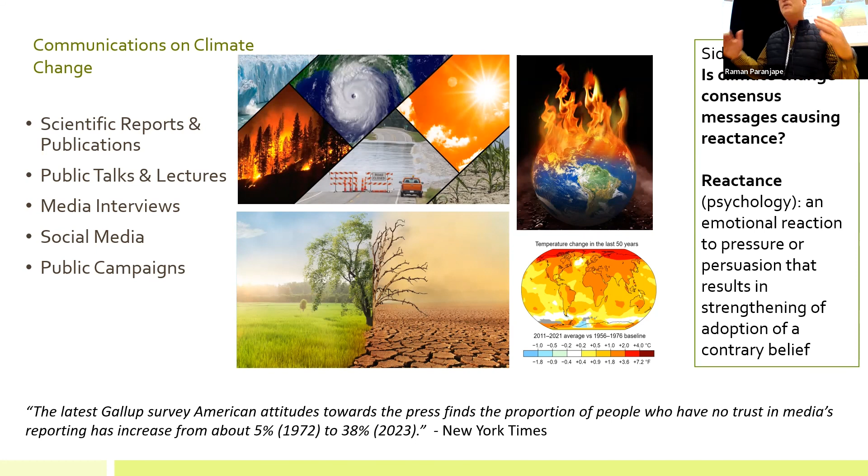I Googled climate change on Google Images, and these are the first four pictures that come up, the earth on fire, all the macro impacts of our decisions. And so what you're starting to see in the literature today is what researchers are calling climate change reactance, and that is actually starting to push people back from the communications happening on this subject.

So that really got me thinking about climate change as a brand. As a brand, the early adopters and the innovators are there, right? Those are the people making these decisions right now. And that is certainly moving forward.

Having said that, the vast majority of people, when making home buying and renovation decisions, haven't moved far enough down that change that they're going to make those type of investments that really need to happen to hit the goals we have seen out there today.

So, how do we get homeowners and home buyers to take action? What I would suggest today is we need public and consumer education focused on the benefits of net zero homes and retrofits. We need municipal, provincial, federal, and crown utility incentives, and we need to leverage financial tools like mortgages and home ownership. I'll dig a little bit deeper into those here.

So, the benefits of investing in net zero energy homes. As I've talked in the past to builders right here in Regina who build net zero energy homes today, and I've talked to them in the province and actually right across the country, what's interesting is what they have in common. They don't talk to their clients about climate change, and they don't talk to them about decarbonization.

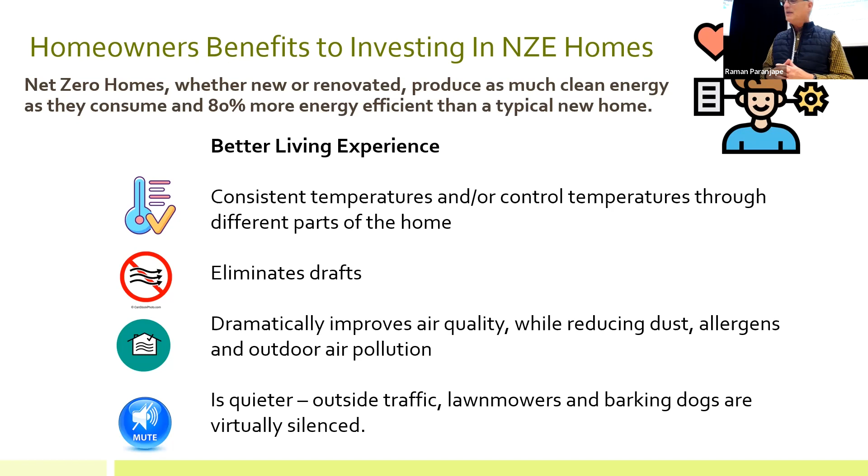And the return on investment. This is an area where we really need to invest a lot more time and effort in showing home buyers and homeowners those returns on investment. There's the obvious one, immediate monthly reduction in utility bills and how they stay low, and how it protects you from future increases in energy prices over the past few years. And that can really be a big deal. But here's one example of a study I found from Zillow.

They looked at 3 million home sales over a 2-year period and discovered the average price premium on those homes for these typical features placed in the home at resale, and how it actually sold those homes faster.

So I'll use the example of a $500,000 home. If you had all those features in your home and sold it for 4.65% more, there's $23,000 right there on the resale of that home. And if it sold 57 days faster, on your average mortgage at current interest rates, you get about another $5,000 in savings there.

So remember, it's about $30,000 extra investment. Well, there's $28,000 of it right there, all at the same time as doing our part on decarbonization. So let's talk about how government and utilities need to invest in the transition of existing housing stock.

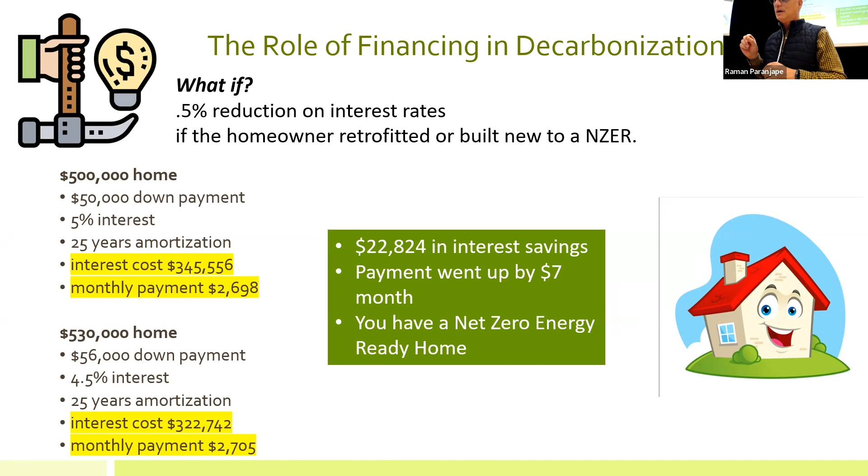Now, what's the role of financing in decarbonization? Imagine if we could get CMHC, the Bank of Canada, and the federal government to develop a program that reduced the interest charged on a home by 0.5% if it's built or retrofitted to net zero energy right now. Using a simple example of a $500,000 home with an extra $30,000 to hit net zero ready, reducing the interest rate by 0.5% would save about $22,000 in interest over the life of the home. Your payment would go up by $7 a month, and you'd have a net zero energy ready home today.

And the demographics really work well. Generation Z and millennials are the future now of home buying, and the future of home building. They have a very high interest in climate change, decarbonization, and also home ownership. So those pieces come together to make some really good motivation.

But here's the rub. In our country, we have made it exceptionally difficult for young people and young families to access home ownership. In fact, recent polls show 63% of Canadians who don't own a home are giving up on the idea of home ownership, even though 76% of them feel owning a home is the best investment a person can make. In Regina last year, over 50% of new housing starts were purpose rental, and so far this year in the first quarter that number is closer to 90%. We've really shifted public policy to the rental market.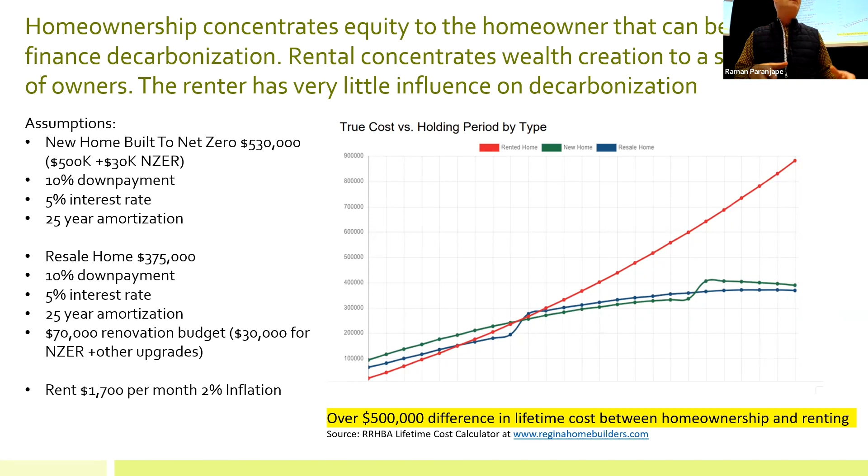Using an example of approximately a $500,000 home built brand new with $30,000 extra invested into net zero energy, versus buying a resale home for $375,000, doing a $70,000 renovation for a beautiful kitchen while tucking away $30,000 for energy improvements, or in Regina renting a decent townhouse for about $1,700 a month: over a 25-year period, the difference between home ownership and renting is about $500,000 in net worth. A recent report calculated that millennials who stay renters the rest of their lives will have to save 50% more than millennial homeowners in retirement. Again, that's all money competing against decarbonization and making other investments in these areas.

So to conclude quickly, here's my thought on what needs to occur. Communication, marketing, retrofits, and building new needs to focus much more on direct benefits to homeowners. All levels of government need to invest real dollars in incentivizing this transition. We need to leverage the fiscal capacity of homeowners to invest in decarbonization, and make it easier and cheaper to finance and get approved when people are making the right public decisions to invest in decarbonization. That's what I have to say. I'd be glad to take any questions, although I know time is running.

It's fantastic, but I do need to limit questions. We have one question—I think you answered everybody, okay, but it was brilliant. I really appreciate it, really good. Okay.

So our last speakers for the day are Alicia and Kevin. There's Kevin. This is going to be complicated because Kevin is in Ottawa? In Toronto. Okay, so Alicia has all the slides, let me see if I can bring them up. Wow, this is the mic. Yeah, that's the one. Okay, which slide am I looking for? Efficiency, I remember. Just present it. Yep. Which one? This one? Oh, this one? That one also helps. Okay, all right, good to go. Good to go, okay, cool. Everyone can hear me? Yeah, okay. Kevin, can you hear us? Oh, we can't hear Kevin. We could just a bit ago. We could, yeah. Is he muted? No, not muted. Sorry, is that better? Okay, there we go. Okay, thank you very much.

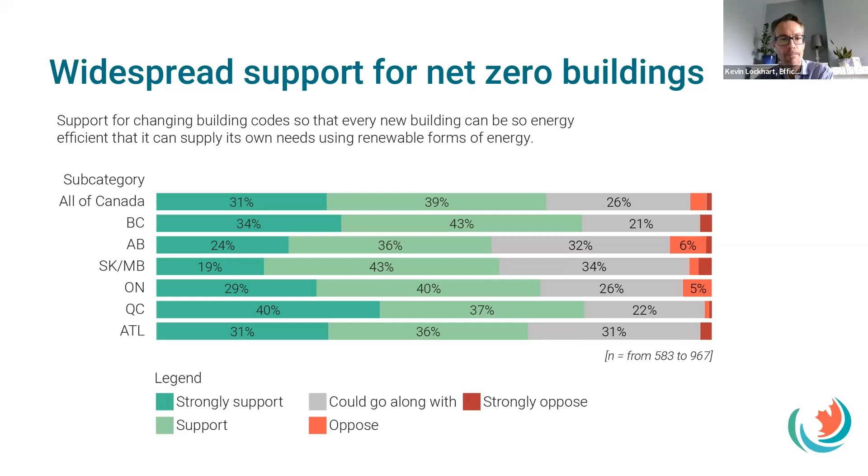Sorry, thank you, Alicia. Yeah, that's one. And so just want to talk a little bit about tiered codes and how they differ from conventional codes.

Tiered codes offer a framework for increasing the energy efficiency of new buildings at each tier. This stepped approach starts with the base tier, tier 1, roughly equivalent to NECB 2017 or the National Building Code 2015, and moves upward through the tiers to the net zero energy ready standard.

The key benefit of the tiered codes is that it offers a roadmap for where we're going. It also helps foster confidence in the market, and that confidence will allow industry, builders, developers, as well as individuals to invest - for the former in their business processes, and in the latter in their workforce and career potential.

Tiered codes help bring together in that long-term roadmap things like technical leadership, education, incentives, and programs based on having a long-term anchor around which they can develop a strategy.

Tiered codes also provide a significant degree of flexibility for local governments. And local governments, given their other capacities like responsibilities for land use as well as building code compliance, are placed in a good spot in order to shorten the runway to the net zero energy ready standard.

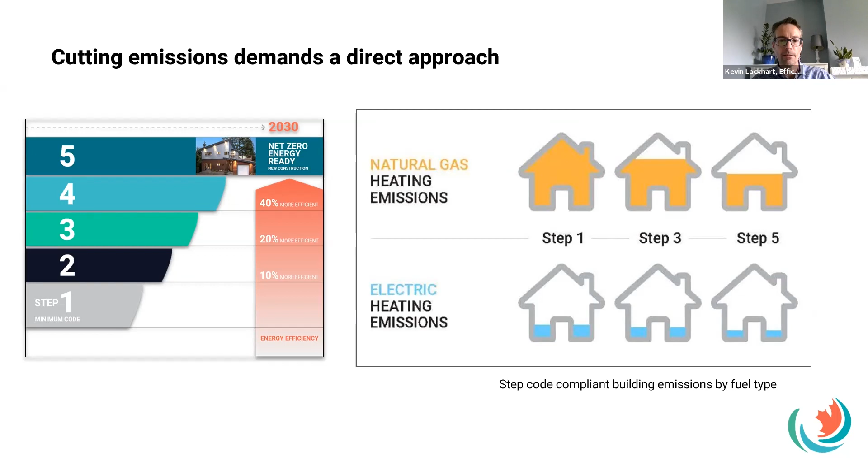This slide is really intended to highlight where we're at in terms of the development of that code. We're in the very early stages, with both policy and technical components being developed in a somewhat unique, concurrent manner. Work is also underway, as I mentioned, to include that emissions objective.

We're also dealing with some of the fundamental questions which we raised in our municipal guide for net zero emissions codes, but also within things like the public comment period—the consultation that was just held, wave one, I guess it was termed, for the net zero emissions code, which just closed this past month. We'll also see a second wave of call for comments later this year that will look at very specific questions, some of which we're talking about in this presentation.

I'd also like to highlight that due to the 24-month adoption period under the Canadian Free Trade Agreement, some measures, including those particularly for embodied carbon, won't see real action until 2032. So as the code is developed up until 2030, 2025 will focus on operational emissions and 2030 on embodied emissions. With the two-year adoption period, that puts us at close to 10 years.

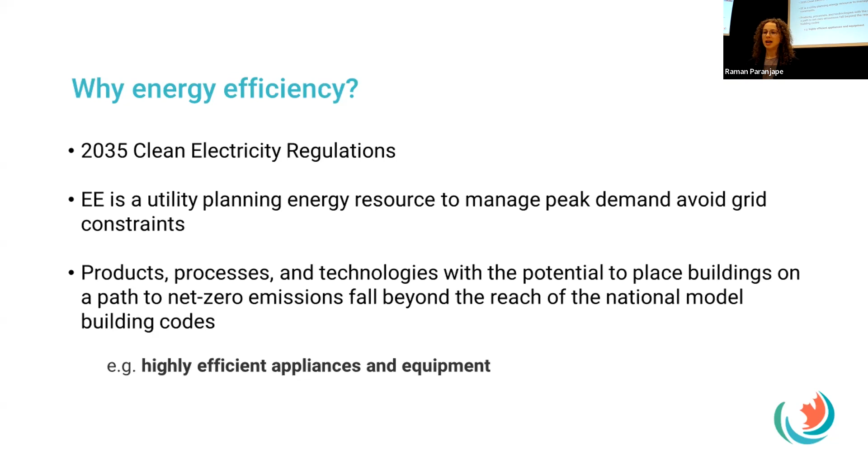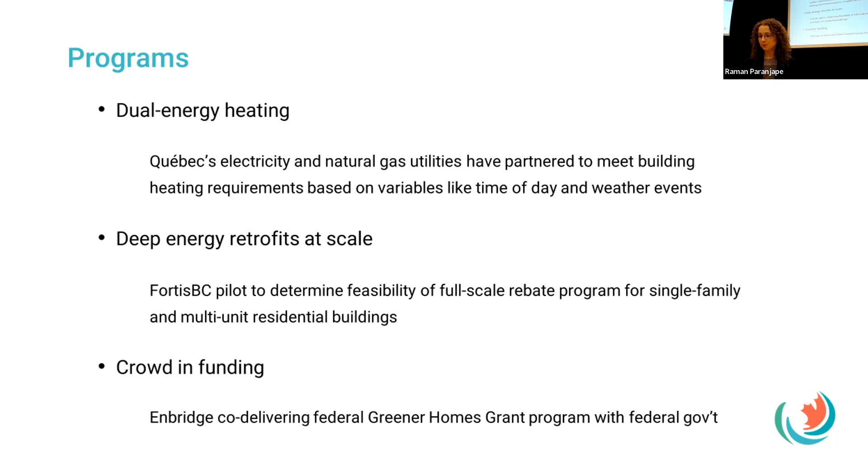These building professionals play a really key role in ensuring that we can roll out these energy efficiency programs and achieve energy savings. Things like model codes, building codes, and strong market signals add certainty to these professions and ensure their longevity. The more certainty we have about these roles, the more people will come into that space.

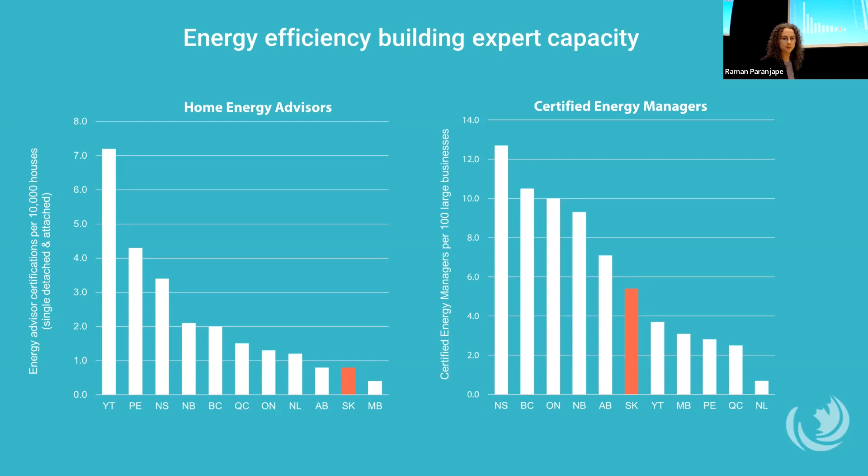All right, and just lastly here, one more thing we see provinces and municipalities doing is using home energy labels as well as mandatory disclosure on the commercial level. For example, in Alberta, specifically in Calgary and Edmonton, there is an energy label program for households.

What this does is these energy labels show where a house fits in terms of their energy use amongst other houses of similar kind. So this can come into play when, let's say, a buyer is interested in a home. They can understand how energy efficient that home is, what upgrades might need to be done or still need to be done, and what kind of money they could save coming from a different home.

So essentially these are all different types of policy tools being used across the country. The stronger the policy, the more energy we can save and continue to decarbonize our buildings. So that's everything we have for you today.